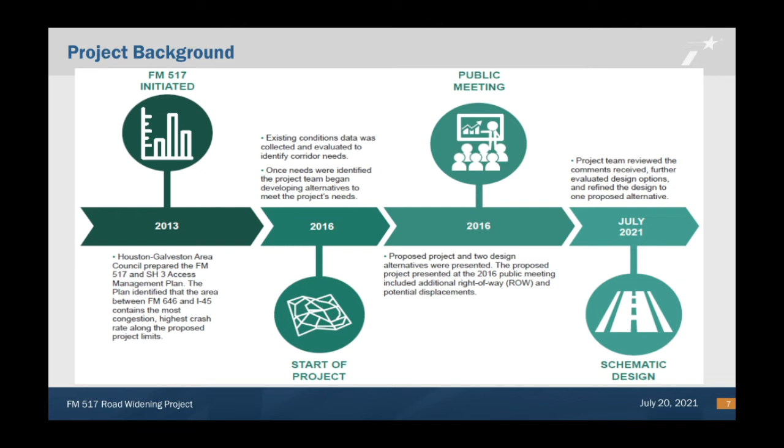The existing FM 517 roadway from SH35 to McFarland Road consists of two 12-foot wide travel lanes, one in each direction, with no median, and 9.5-foot wide shoulders and open vegetated ditches or swales. The existing right-of-way in this section of the project is approximately 100 feet in width.

At SH35, the intersection of FM 517 with the SH35 northbound and southbound frontage roads includes left turn lanes in between the two frontage roads.

From McFarland Road to FM 646, the existing roadway has two 12-foot wide travel lanes, one in each direction, a 14-foot wide center left turn lane, 4-foot wide shoulders, and open vegetated ditches or swales. The existing right-of-way in this section of the project is approximately 100 feet in width. The existing roadway includes left turn lanes in each direction onto FM 646.

From FM 646 to I-45, the existing roadway consists of four 12-foot wide travel lanes, two in each direction, 5-foot wide sidewalks in each direction, with a 14-foot wide center left turn lane, no shoulders, in a curb and gutter drainage section. The existing right-of-way in this section of the project is approximately 100 feet.

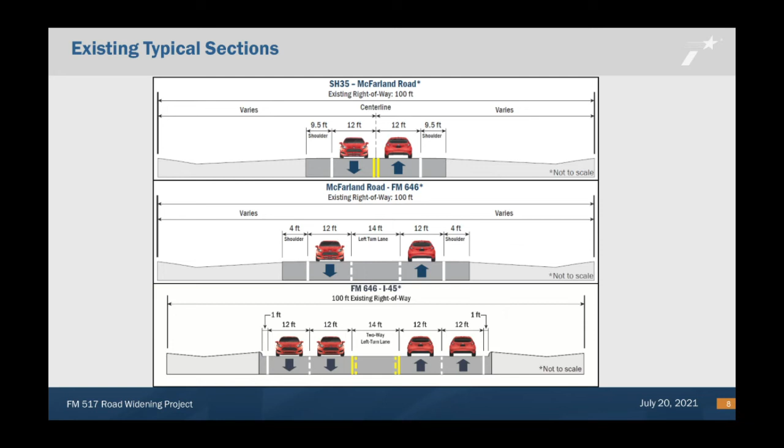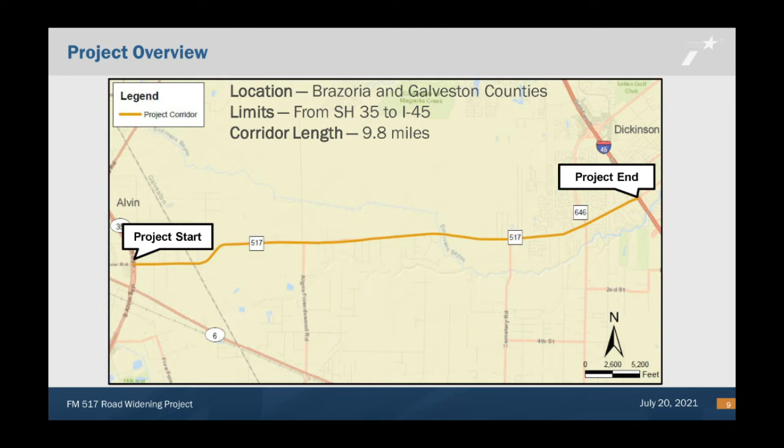The project's study limits extend on FM 517 from SH35 to I-45 between Alvin and Dickinson for approximately 9.8 miles. Proposed improvements on FM 517 would accommodate future anticipated traffic demand and growth in the region. The proposed project is needed to address the high crash rate, increased traffic demand, and lack of multimodal and regional access in Brazoria and Galveston counties.

In 2014, the existing FM 517 facility accommodated about 22,600 vehicles per day. That number is expected to grow to 32,700 vehicles per day by 2040, an increase of approximately 44.7%. This increased growth is expected to result in increased traffic demand. The proposed project would address these mobility concerns.

The purpose of the proposed project is to accommodate future anticipated traffic demand and growth in the region, as well as improve safety and mobility by constructing a divided roadway with raised medians.

In the 6-year period from 2010 to 2016, the number of crashes increased substantially, with a total of 652 crashes. Year-over-year increases ranged from approximately 10 to 44%, except from 2012 to 2013, more than doubling from 2010 to 2016. The number of crashes increased from 53 annual crashes to 138.

On average, nearly half of all accidents were intersection-related.

The proposed project would widen FM 517 from SH 35 to FM 646 from 2 to 4 lanes, provide 14-foot wide shoulders, provide 10-foot wide shared use paths on both sides of the roadway, provide a curb and gutter drainage system with open vegetated ditches, and require 61 acres of proposed right-of-way.

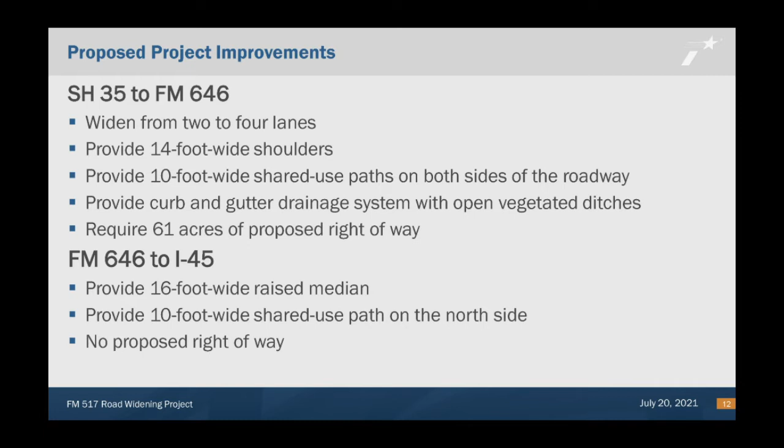The proposed project would improve FM 517 from FM 646 to I-45 by providing a 16-foot wide raised median and a 10-foot wide shared use path on the north side. There is no proposed right-of-way within these limits.

The proposed project would widen FM 517 from SH 35 to FM 646 from 2 to 4 lanes, provide 14-foot wide shoulders, provide 10-foot wide shared use paths on both sides of the roadway, provide a curb and gutter drainage system with open vegetated ditches, and require 61 acres of proposed right-of-way.

The proposed project would improve FM 517 from FM 646 to I-45 by providing a 16-foot wide raised median and a 10-foot wide shared use path on the north side. There is no proposed right-of-way within these limits.

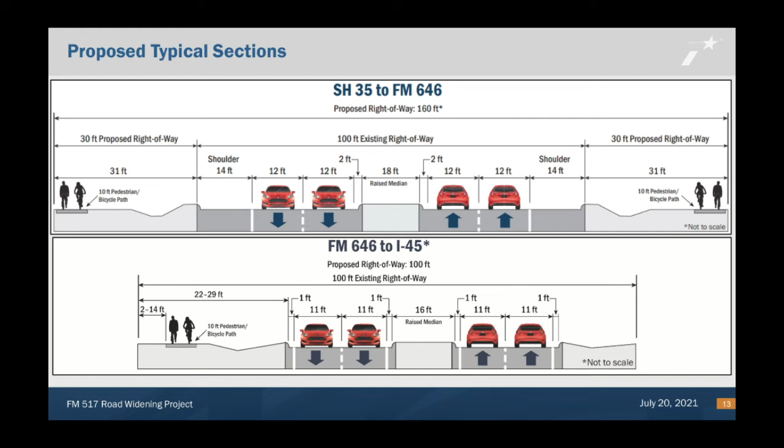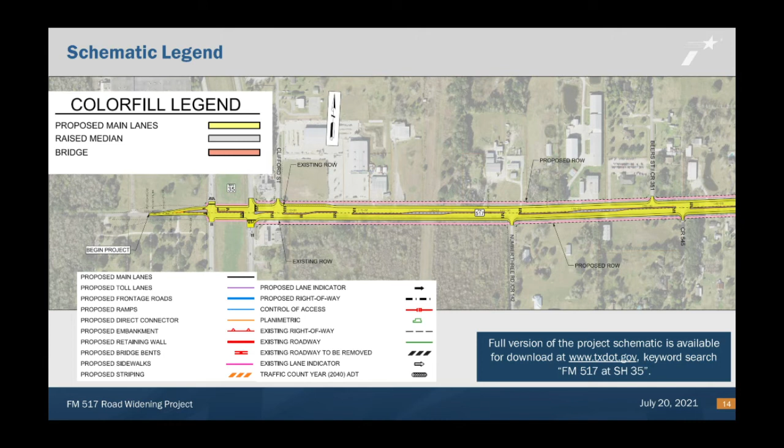The estimated construction cost is approximately $100 million, with 20% of the funding from state sources and 80% from federal sources.

The proposed action is consistent with the HGAC's Financially Constrained 2045 Regional Transportation Plan, and the project is listed in HGAC's 2019 through 2022 Transportation Improvement Program.

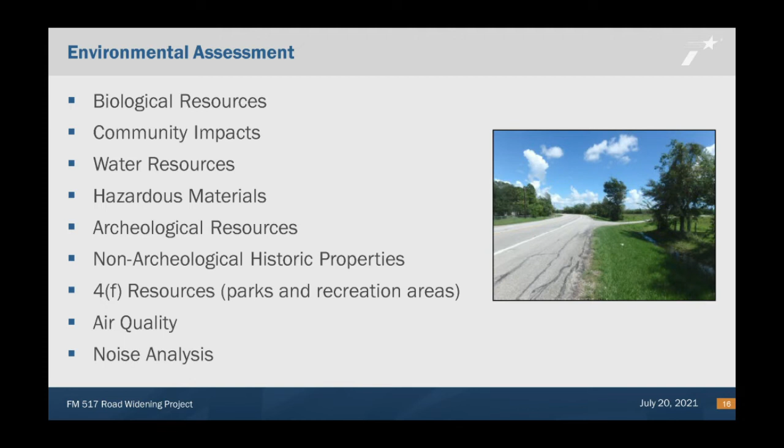I will now discuss the environmental studies completed for the proposed project. The project team identified and evaluated potential environmental impacts in resource-specific technical reports and summarized those impacts in the draft environmental assessment. Each of these studies are available online on the project webpage for public review. As part of the project's NEPA compliance, TxDOT considered biological resources, community impacts, water resources, hazardous materials, archaeological and historical resources, and park and recreational areas. The project was designed to avoid or minimize impacts to the greatest amount practicable. Overall, impacts to environmental resources as a result of the proposed FM 517 road widening project would be minimal.

Biological resources studies include evaluating potential impacts to vegetation, wildlife habitat, and threatened and endangered species. Vegetation impacts include 77.92 acres of urban low-intensity vegetation, 6.67 acres of mixed woodlands and forest, 8.10 acres of riparian vegetation, 21.34 acres of coastal grasslands, 8.43 acres of disturbed prairie, and 2.57 acres of agricultural vegetation.

Coordination with Texas Parks and Wildlife has been conducted for the proposed project. Although several federally listed species are known to occur in Brazoria and Galveston counties, no suitable habitat for any of these species was identified by qualified biologists during field investigations. The build alternative would have no effect on federally listed species. The proposed project is within range of and with suitable habitat present for state-listed species and species of greatest conservation need. The build alternative is not anticipated to cause a substantial impact to any state-listed species.

Next, I will discuss community impacts. The communities surrounding the project area range from rural, residential, and mixed use. Multiple types and numbers of community facilities are present within the project area, including medical facilities, child care centers, veterinarian offices, funeral homes, elderly housing, religious facilities, a volunteer fire station, a school complex, a cemetery, an exotic animal zoo, and a railroad museum. A few neighborhoods would be impacted by access changes. Alternative access points or U-turn areas have been identified for these neighborhoods.

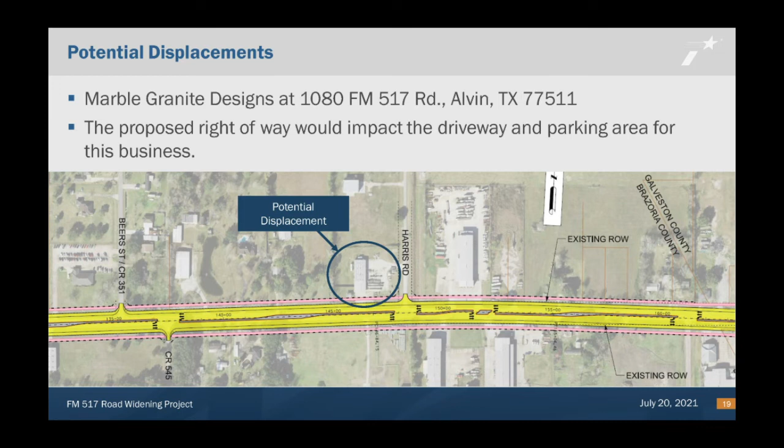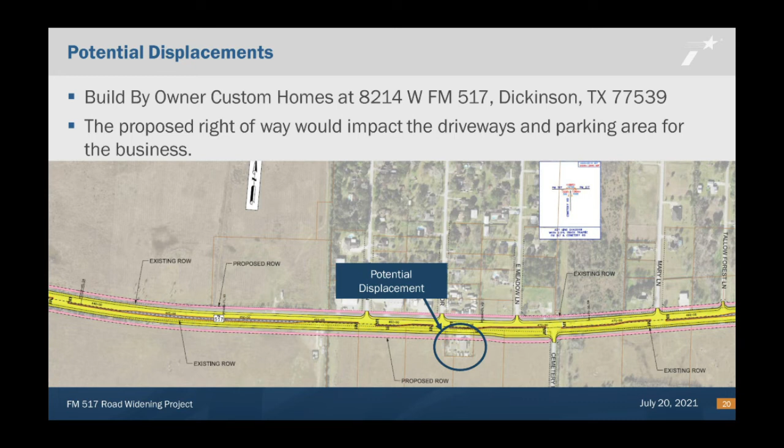Another commercial displacement could potentially occur at Build by Owner Custom Homes, located at 8214 West FM 517, Dickinson, Texas 77539. The proposed right-of-way would impact the driveways and parking area for this business.

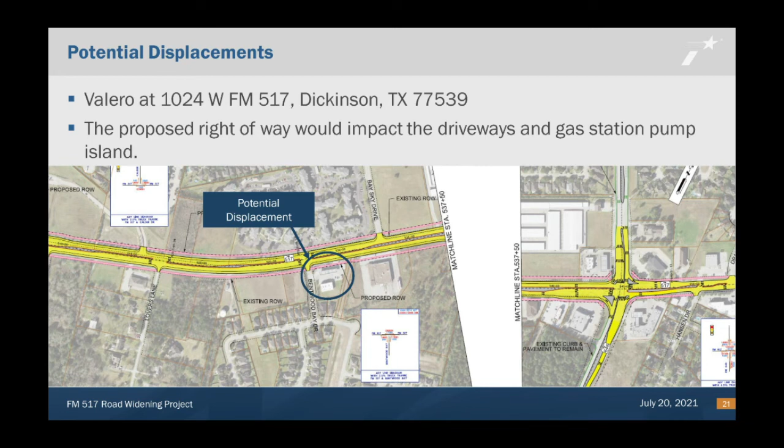Another commercial displacement could potentially occur at the Valero gas station, located at 1024 West FM 517, Dickinson, Texas 77539. The proposed right-of-way would impact the driveways and gas station pump island.

9 man-made ditches, Dickinson Bayou and Cedar Creek, are potentially jurisdictional waters of the U.S. that may be impacted by the proposed project. A U.S. Army Corps of Engineers individual permit is anticipated prior to construction. Dickinson Bayou is a tidally influenced perennial stream and a potentially jurisdictional Section 10 water of the U.S. Therefore, permitting under Section 9 and 10 of the Rivers and Harbors Act, administered by the U.S. Coast Guard and U.S. Army Corps of Engineers respectively, is also anticipated.

A hazardous materials initial site assessment was completed, and 12 hazardous material sites of concern were identified. 1 gas station pump island would be affected by the proposed project. Responsibilities for removal and disposition of the pump island at the Valero station would be addressed in the right-of-way negotiation and acquisition phase, in accordance with established TxDOT procedures and applicable regulations.

Cultural resources investigations evaluated archaeological and historic structures. No new archaeological sites were identified for the parcels surveyed. However, a total of 38.89 acres of proposed right-of-way, for which survey was recommended, could not be directly accessed due to lack of right of entry. Surveys and any required consultation with Texas Historical Commission would occur following right-of-way acquisition. No historic, non-archaeological properties were identified.

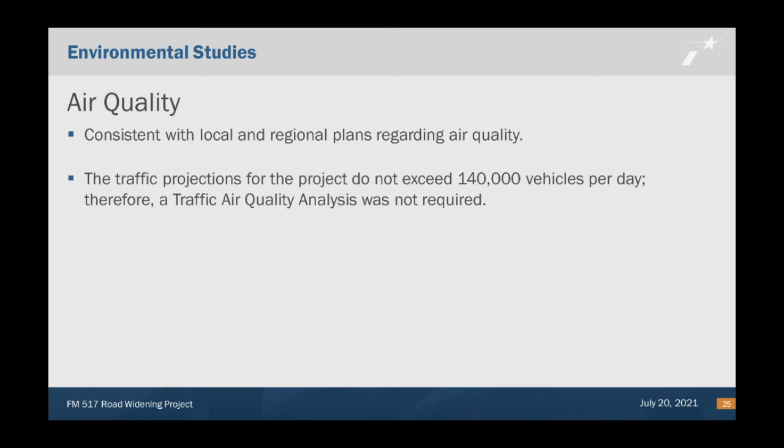The proposed action is consistent with the HGAC's Financially Constrained 2045 Regional Transportation Plan, and the project is listed in HGAC's 2019 to 2022 Transportation Improvement Program. The traffic projections for the project do not exceed 140,000 vehicles per day. Therefore, a traffic air quality analysis was not required.

A traffic noise analysis was conducted for the proposed project in accordance with TxDOT's FHWA approved guidelines for analysis and abatement of roadway traffic noise. Existing and predicted traffic noise levels were modeled, and based on this model, the proposed project would result in a traffic noise impact. Noise barriers were evaluated and determined not to be feasible or reasonable for construction.

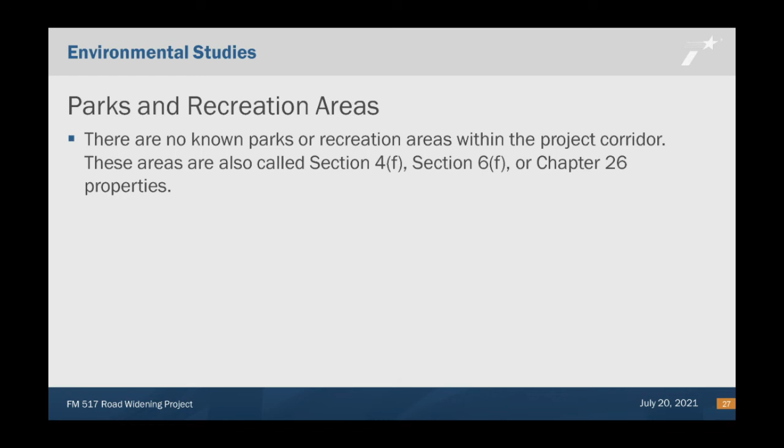There are no known parks or recreation areas within the project corridor. These areas are also called Section 4F, Section 6F, or Chapter 26 properties. TxDOT coordination with Texas Parks and Wildlife Department was completed on June 13, 2020.

Per TxDOT's Memorandum of Understanding with the Texas Commission on Environmental Quality, TxDOT provided the Texas Commission on Environmental Quality with a notice of availability of the draft environmental assessment.

Coordination with the U.S. Army Corps of Engineers would be required regarding potential impacts to jurisdictional features. Coordination would be conducted following completion of the detailed design.

TxDOT initiated coordination under Section 106 of the National Historic Preservation Act under the programmatic agreement between TxDOT, the State Historic Preservation Officer, the Federal Highway Administration, and the Advisory Council on Historic Preservation, and under the Antiquities Code of Texas Memorandum of Understanding between the Texas Historical Commission and TxDOT on May 24, 2017.

TxDOT recommended that the project be allowed to proceed with construction. Concurrence was received on May 25, 2017.

Tribal consultation with federally recognized Native American tribes with demonstrated historic interest in the area was concluded on February 6, 2017. No objections or expressions of concern were received within the comment period.

The State Historic Preservation Officer determined that there are no historic, non-archaeological properties within the area of potential effect and cleared the project for non-archaeological historic resources on April 22, 2020.